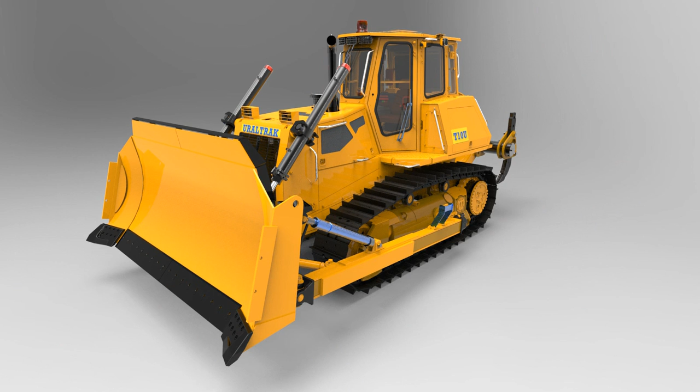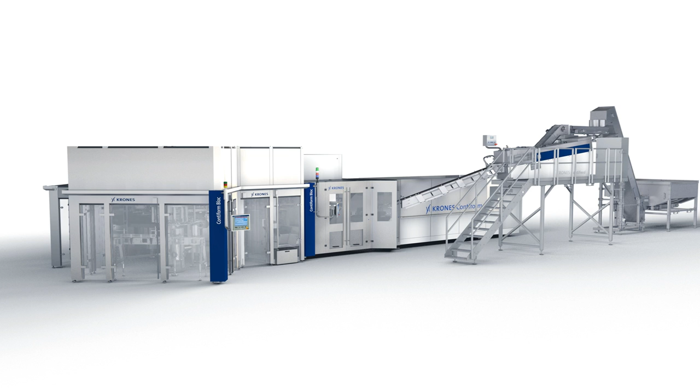Solid Edge continues to set the standard for streamlining 3D designs of products, whether they're a single part or an assembly of over 500,000 components. In this demonstration, we'll show how Solid Edge ST7 speeds design of areas around a bulldozer engine.

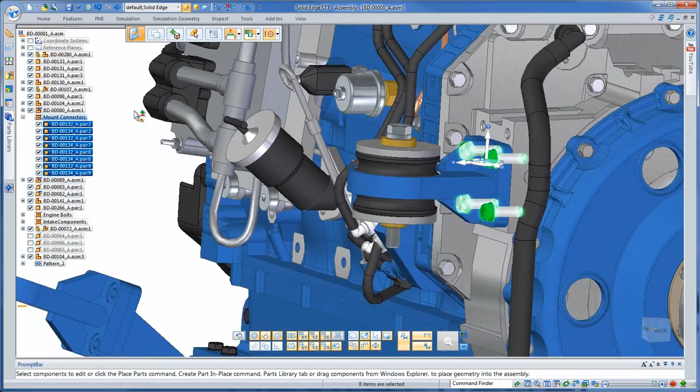First, we'll work on the engine mounts. This engine has 4 mount locations, and the appropriate bushings, washers, tension, and mounting bolts are organized into a single subassembly, which we've placed in one location. First, we'll grab the 4 sets of mounting bolts and washers by selecting one set, then use Select All Identical Parts to include the other 3. We'll also select the tension bolt, washers, and bushings within the mounting assembly.

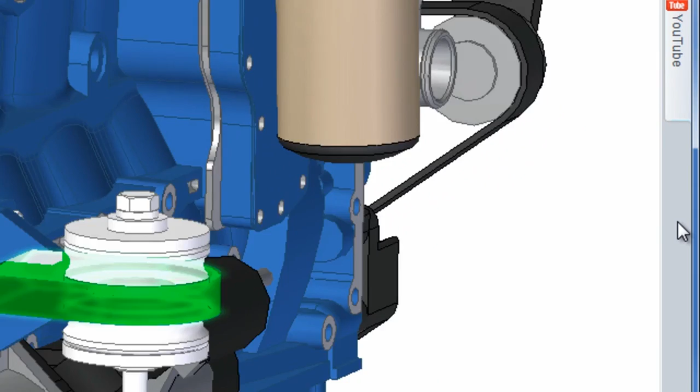Watch as we use Duplicate Components to copy all of the selected hardware from the initial position to a second position. Note the preview of the duplicate. A valuable option within this command is Select Matching Occurrences, which finds the 3rd and 4th mounting positions towards the rear of the engine. Very smart and very fast.

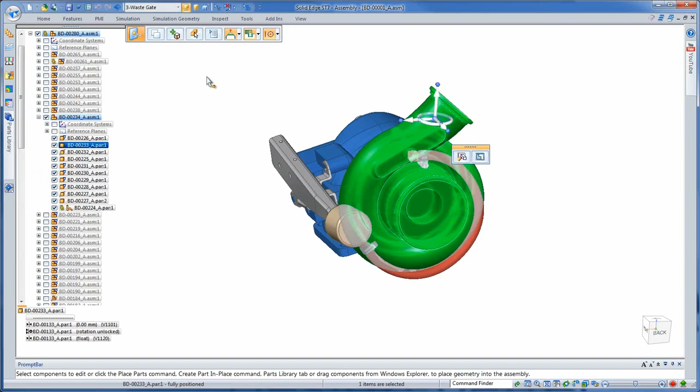Impressive real-time rendering capabilities are now available within Solid Edge ST7, courtesy of Keyshot. This easy-to-use but powerful application is integrated into Solid Edge for advanced photorealistic visualizations of your 3D design, without ever leaving the modeling environment. Again, working with the bulldozer engine, we'll open its turbocharger assembly.

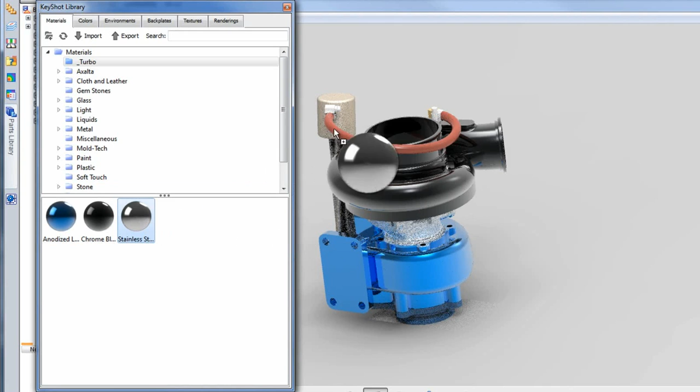Keyshot is available from the Solid Edge command ribbon and will open the turbocharger into a separate rendering window. Appropriate colors and materials are automatically transferred from the modeling environment, though you can also assign materials and colors from Keyshot, and watch the turbocharger update before your eyes.

Getting back to modeling, we want to be able to rotate one port of the wastegate tube. As we grab it and rotate, you can see the tube itself lengthens. In real life, this tube would be cut to a specific length and would not elongate.

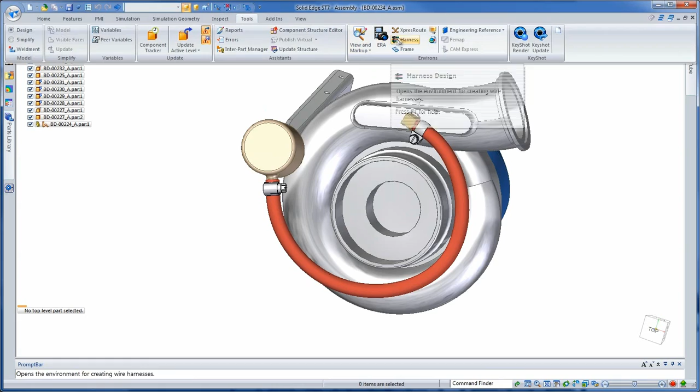You can model that realistic behavior by editing the tube's underlying key point curve and selecting the new option, Curve Length Step. The new Fixed Length option allows us to define a finite length of the curve, which ensures the tube length is fixed as well. We can even constrain the curve to only move in a specific direction, a great option to replicate conditions under which the turbocharger is actually maintained.

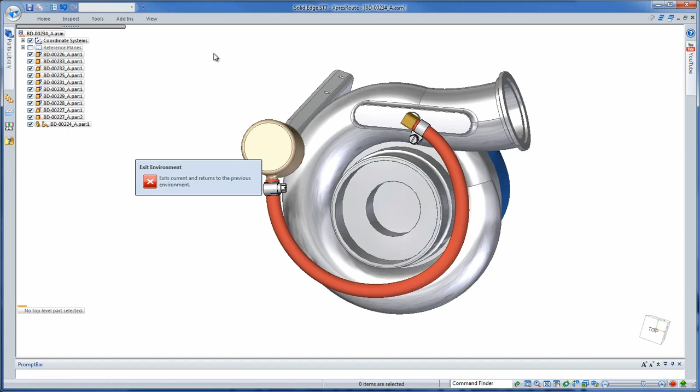So you can use the 3D model to develop maintenance documents for the real component. Returning to the assembly, watch as we rotate the intake port. The tube's length remains fixed as it would in a real system.

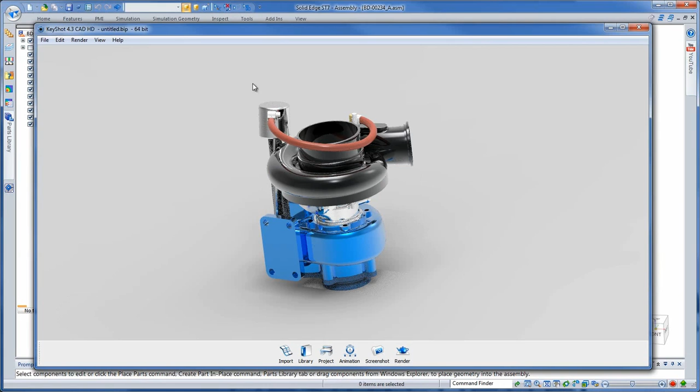Let's go back to Keyshot, but first we'll select Keyshot Update to ensure all of the model changes propagated to the rendering. The resulting realistic imagery could greatly enhance any equipment maintenance manuals.

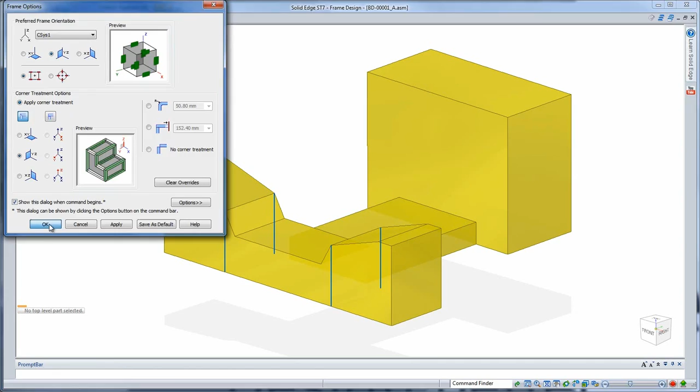Now we want to build an engine test stand. For this, we'll use the frame construction tools within Solid Edge ST7. We'll begin with a solid representation of the test stand and use the edges of these bodies to guide frame creation. The frame command allows you to set a preferred orientation so you get mitered corners placed how you want the first time. Select a solid body and Solid Edge automatically places members based on your preferred orientation.

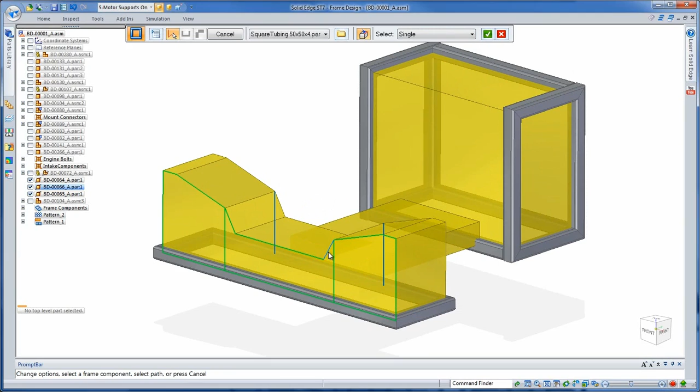Let's remove the center member so it won't interfere with the engine. While we're creating frame members, we can switch between single, chain, face, and body options to get the custom framework for our engine test stand. We'll place more members to connect the front and back of the stand.

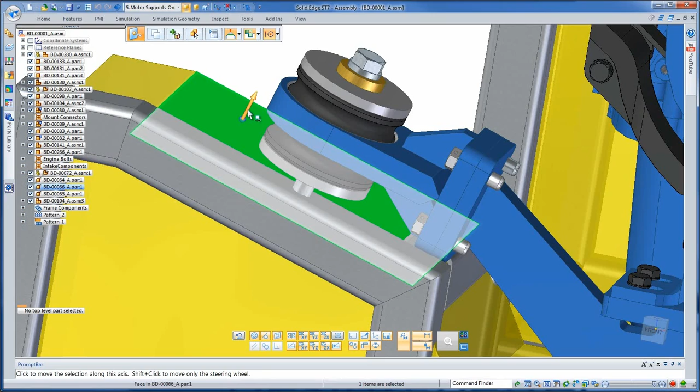Once complete, we'll display the engine and determine how it fits on the stand. In the front, the frame needs to meet up with these mounts, so we'll use synchronous modeling to move a face of the solid and thus the frame to match them up.

With ST7, we listened to our customers' needs and have delivered a fast, flexible, and more intuitive suite of product modeling tools, which allow you to focus more on your designs and less on the tools. Solid Edge. Design better.